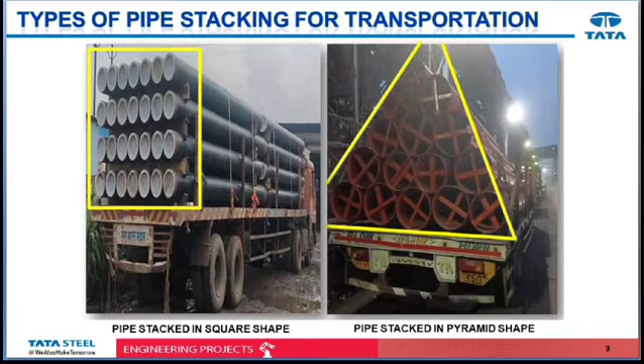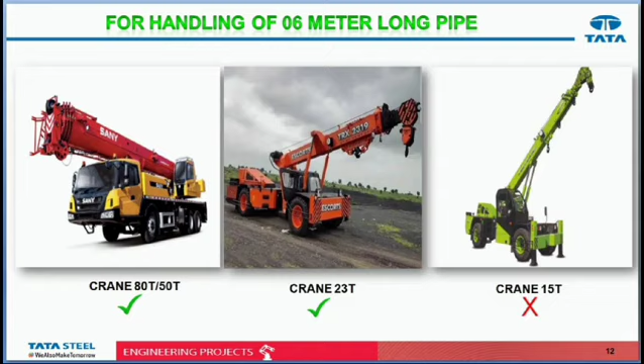Equipment and tools used for handling of pipes. Crane used for loading and unloading of pipes. 80-ton or 50-ton capacity cranes must be used for handling of 12-meter long pipes. 23-ton, 50-ton or 80-ton capacity crane must be used for handling 6-meter long pipes.

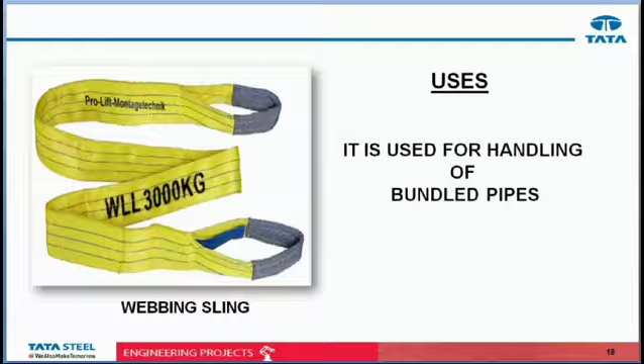Wire sling is used for rigging activities and fixing of the pipe clamp with the crane. Webbing sling is used for handling of bundled pipes below 200 mm dia. Pipe clamp is used for clamping of above 200 mm dia pipes. D-shackle is used for rigging activity with wire sling.

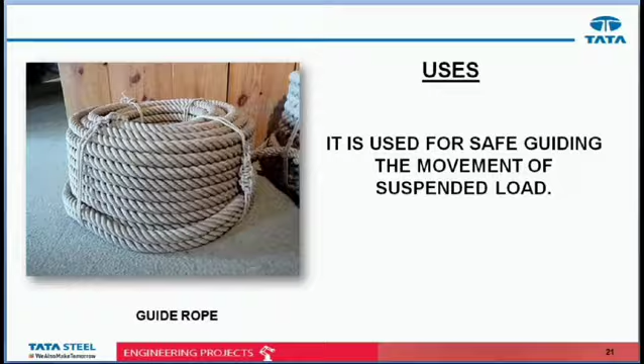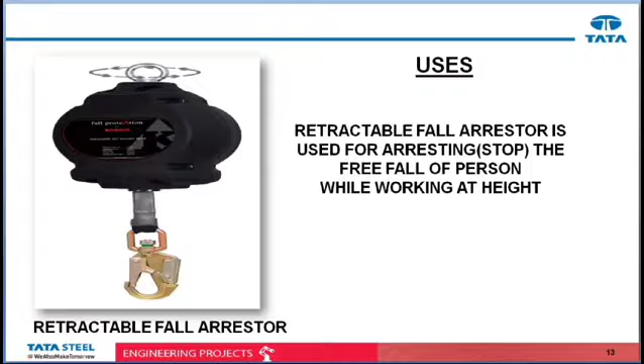Guide rope is used for controlling safe movement of suspended load. Pipe handling hook is used for proper placement of the pipes on saddles. Full body harness is used for fall protection during working at height. Retractable fall arrestor is used for fall arresting during working at height. Fall protection structure provides structural support for anchoring of fall arrestor and full body harness.

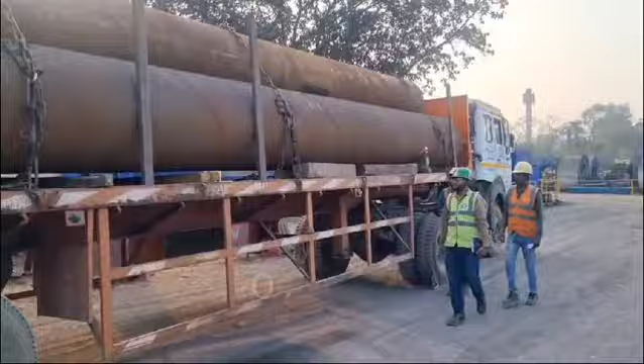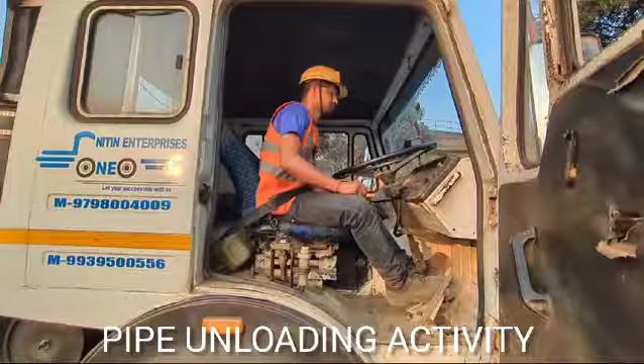Before placing of trailer at unloading point, handling team must conduct inspection of saddle, side support and stacking condition of materials for safe handling. Placement of the trailer at the unloading point must be done safely. Driver must apply gear, use hand brake, remove the key and safety belt, and safely exit from the cabin. Apply scotch block on both sides of wheels in the trailer.

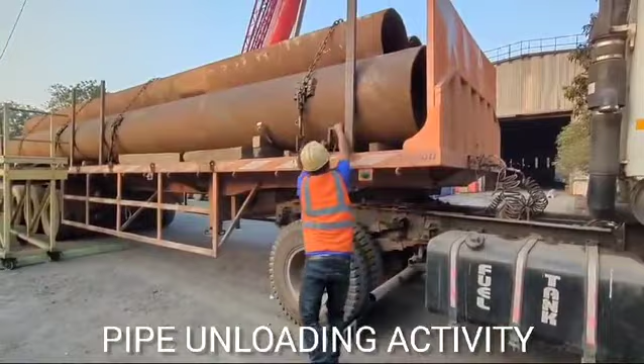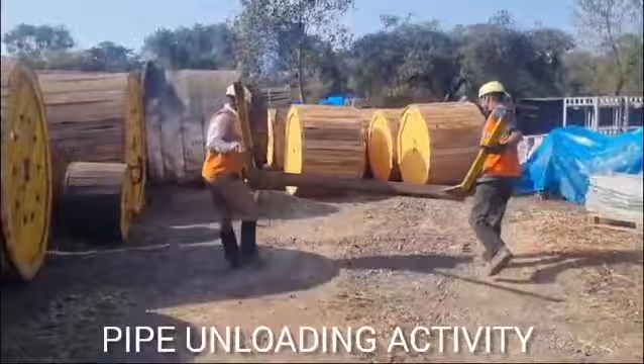The driver must wear full body harness for unlashing the chain. Driver must use fall arresting system with platform ladder while performing unlashing activity in the trailer. Before unloading of pipes, pipe stacking rack must be placed by handling team on designated place for roll-over protection.

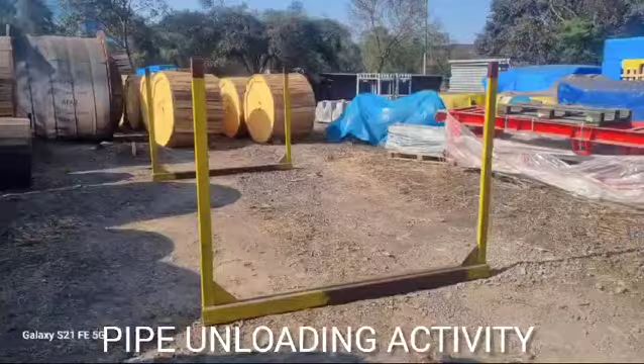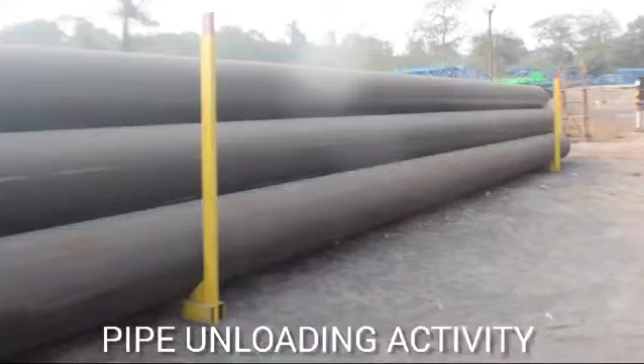For 12-meter length pipe, 3 numbers of pipe racking stand, and for 6-meter length pipe, 2 numbers of pipe racking stand must be used. Pipe clamp must be used for safe loading and unloading, and guide rope must be used for controlling the movement of pipes. Ensure the unloaded pipes have been stacked safely below 1.5 meter of height with the use of roll-over protection.

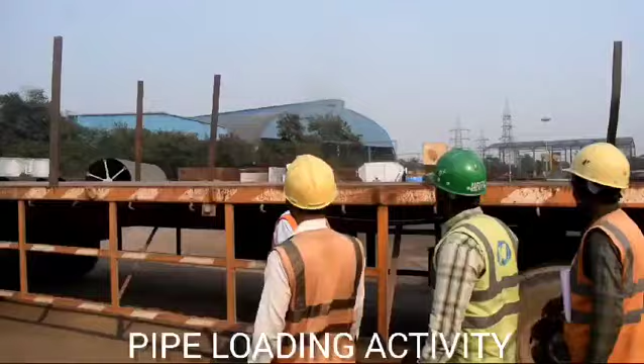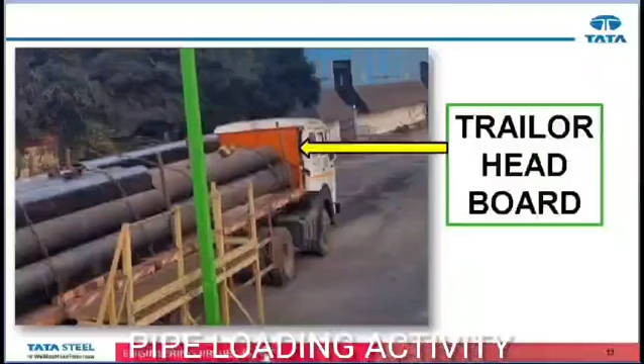Driver must apply gear, use hand brake, remove the key and safety belt, and safely exit from the cabin. Apply scotch block on both sides of wheels in the trailer. Pre-inspection of trailer bed to be done by handling team. 8 numbers side support of length 1500 mm and 75 mm width made of ISMC and HRSC is mandatory requirement for pipe loading. Headboard must be present in the trailer for safe transportation of pipes.

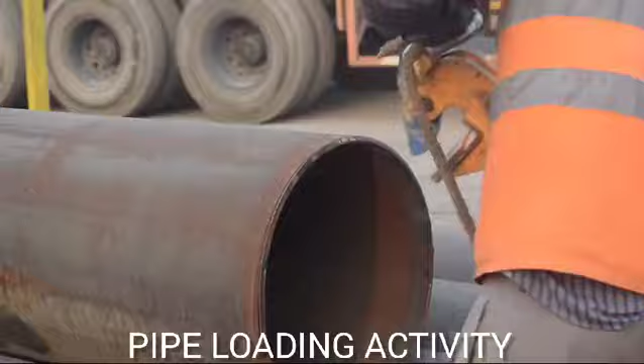Saddles must be present on the trailer bed for safe placement of pipes. Ensure safe storage of pipes before handling. Pipe clamp must be used for safe loading and unloading. Guide rope must be used for controlling the movement of suspended load. Movement under suspended load is strictly prohibited.

Placing of pipe is done by pipe handling hook. Fall arresting system must be used by driver during lashing activity. Before release of trailer from the loading point, for 6-meter long pipe 2 chain lashing, and for 12-meter long pipe 4 chain lashing must be confirmed by handling team.